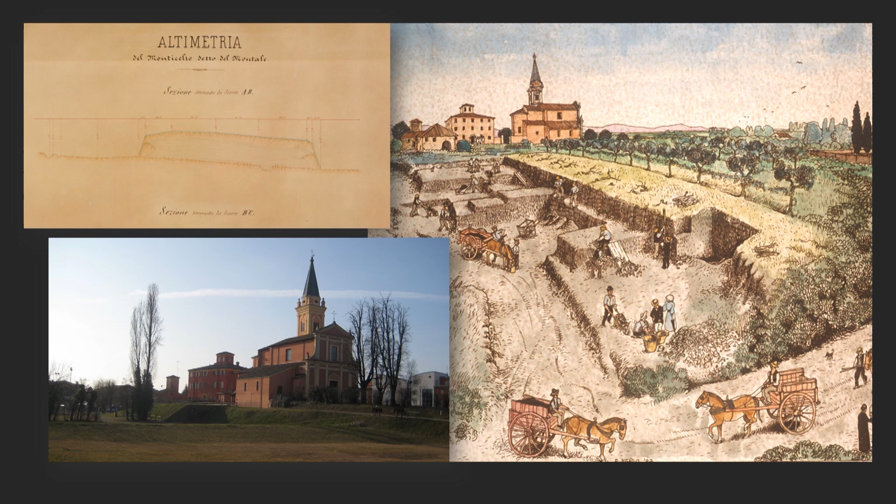Despite the importance of the finds, the hillock of Montale was intensively exploited for the extraction of organic soil, like most of the Terramare settlements in the Po River plain. In 1895, of the ancient village that originally occupied about 1 hectare, nothing was left but the area surrounded by the 17th century church buildings, corresponding to about 1/4 of the village's original size.

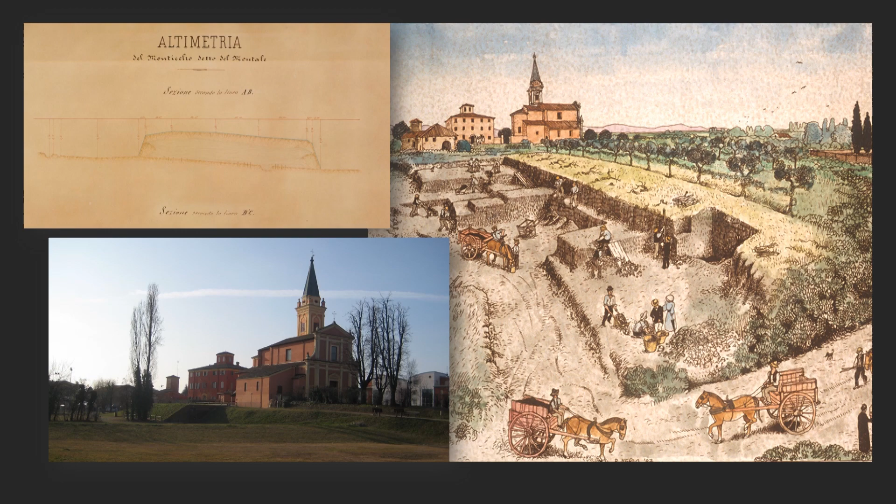In 1994, the Modena Civic Museum restarted archaeological investigation at Montale, and from 1996 through 2002 carried out the archaeological excavation on the intact part of stratification.

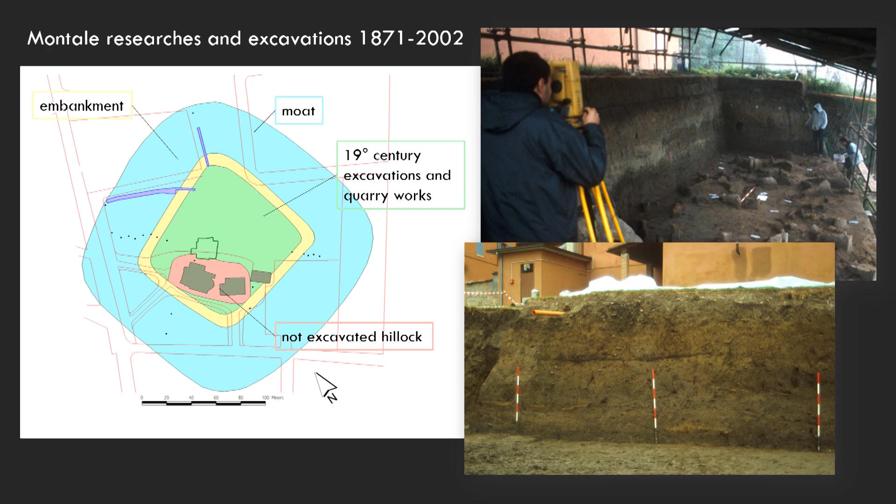The information obtained from the archaeological excavation was so abundant that the project of an open-air museum was progressively developed, in which the reconstruction of the houses, as well as the defensive structures, interacted with the archaeological area originally occupied by the Terramara. The scientific director of the archaeological excavation and of the park project was Andrea Cardarelli, director of the Civic Archaeological Ethnological Museum of Modena until 2003, and now professor at the Sapienza University of Rome.

The park project was shared and supported by Ilaria Pulini, director of the museum from 2003 to 2013. Cristiana Zanasi, coordinator of the park's activities since 2004, is currently its curator.

The museum reference model was that of Northern Europe's open-air museums, with which a lasting collaboration path was undertaken, thanks to the European project ArcheoLive. The aim of the project was to foster knowledge of the strong cultural unity that characterized the Bronze Age throughout Europe, through the reconstruction of archaeological contexts which, built using perishable materials such as wood and clay, have left few archaeological traces. The partners of Modena Civic Museum were the Pfahlbau Museum in Unteruhldingen and the Naturhistorisches Museum in Vienna with the Hallstatt site.

Therefore, starting from scientific and methodological bases, the project for the Open Air Museum actually got underway using the skills of the architect Riccardo Merlo and 2 wood construction technicians who work closely with archaeologists.

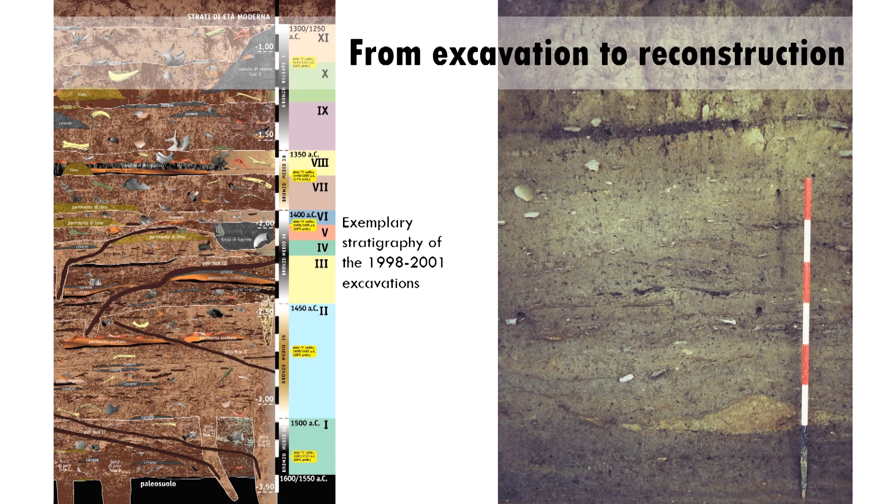The most consistent structural information comes from the first 2 phases, where the presence of post holes and mineralized wooden elements have led to the reconstruction of the floor plans of 2 dwellings and of part of the elevation of the house of phase 2. The houses share the same structural model, and both date to the central phase of the Middle Bronze Age, between the early 16th and first half of the 15th century BC.

They were built on platforms raised 110 to 130 cm from the ground, and had a rectangular plan, with a long side of about 9 meters and a short side of between 6.5 and 7.5 meters. In addition to the alignment of the load-bearing stakes, which supported the roof and walls, stilts were used to support the wooden platform.

Both houses had a 3-nave structure with a porch along the south-facing wall. Some of the load-bearing stakes were preserved for a few meters, and their arrangement suggests the existence of an intermediate floor in each house. At the highest point, the roof was probably over 7 meters from the ground.

The reconstruction of the two dwellings follows, in a strict philological sense, the indications provided by the floor plans of the excavation, with the reproduction of two three-nave structures with a porch on the long side, where the main entrance is also located.

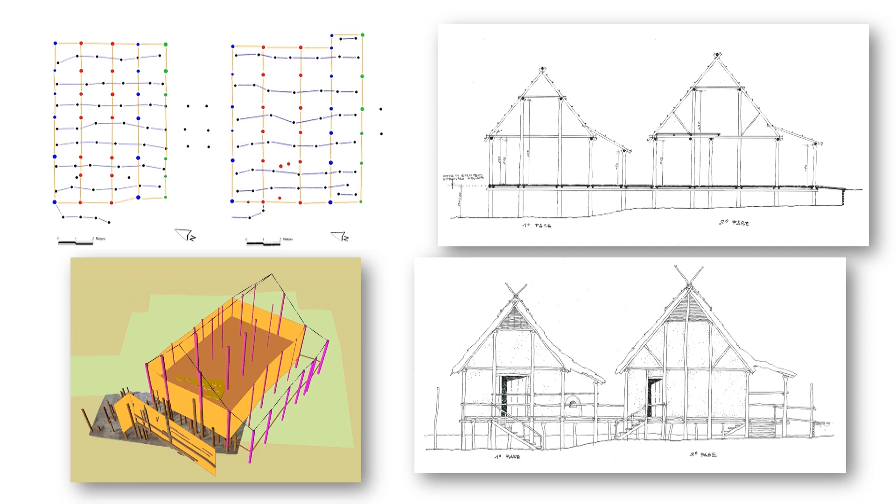In line with the results of the archaeobotanical analysis performed, oak wood was used for the load-bearing structures, which at the time was widely present in the plain. Currently, the oak is available only in the Apennines, the nearest mountains, with specimens not always suitable to the size and shape for the project. For this reason, sometimes chestnut poles were used for the elevated structure.

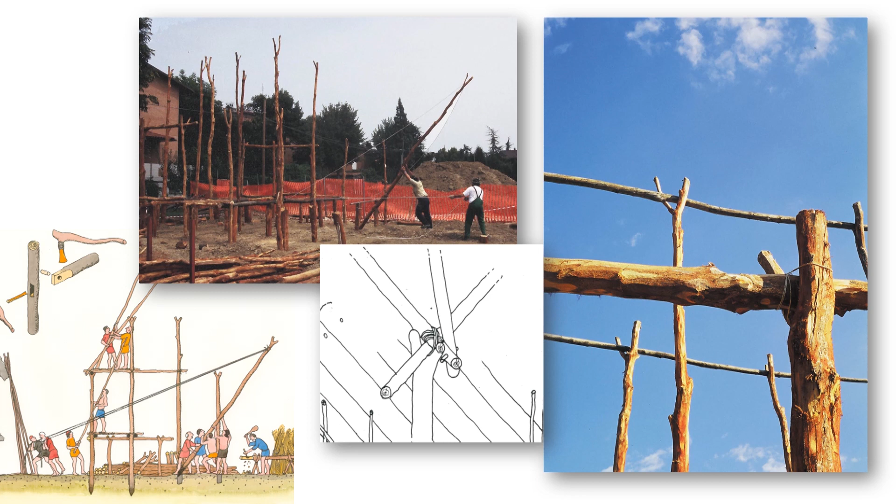Some of the work was performed using faithful copies of original Bronze Age axes and chisels in order to experimentally verify the hypotheses deriving from the archaeological data. The house building was carried out according to the following main steps. Digging of the holes to place the poles according to the measurements and floor plans found in the excavation.

Erection of the vertical poles using taut ropes to ensure the pole is correctly balanced. The vertical poles have a natural fork at their ends to facilitate placing the horizontal spars. Where there were no forks of the required size, it was necessary to construct artificial joints by inserting wooden plugs.

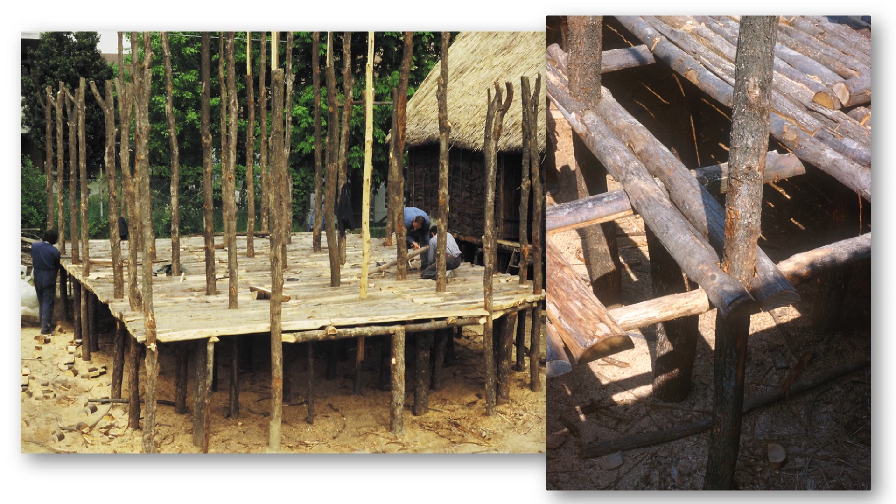Construction of the platform. Cross members are placed on fixed poles. The wooden floor is created with half trunks placed on a structure which is partly independent of that used for covering.

Creation of the double pitch roof. The roofing was made using bundles of swamp reeds, easily available at the time, fixed to the stakes with plant material rope, using a large wooden needle, according to a traditional technique still found in the region of the Po River Delta.

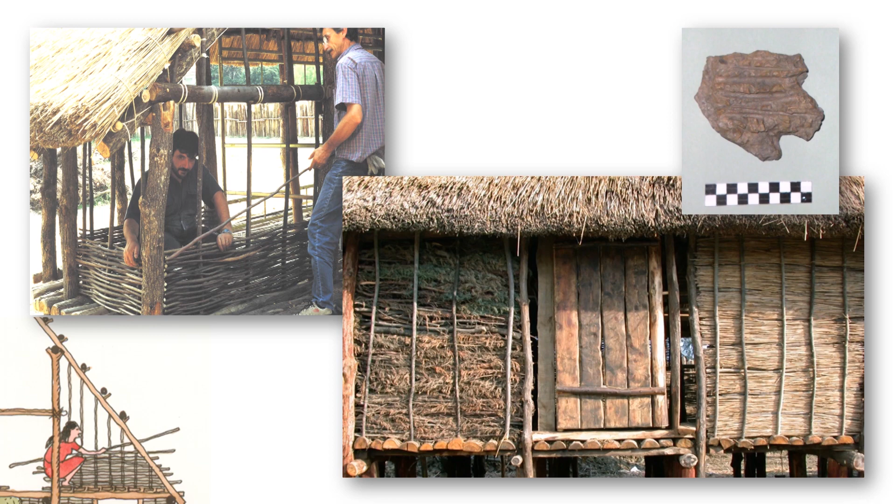Construction of the walls, using a structure of vertical poles positioned on the floor. Three different techniques were used, recognized on the basis of plaster fragments also found in other terramare. Weaving of ash and hazel twigs, filling of the frames with branches held down by horizontal stakes, or with bundles of swamp reeds arranged horizontally and again held down by stakes.

The analysis performed on fragments of plaster and floor showed that the main components, in varying quantities, are silt, sand, and clay, with a small percentage of gravel and organic material. The plaster was therefore made using a mixture composed mainly of silt loam and secondarily of sand, with the addition of small quantities of animal dung. The wooden floor was spread with beaten earth, on top of which a layer of mud and sand was laid.

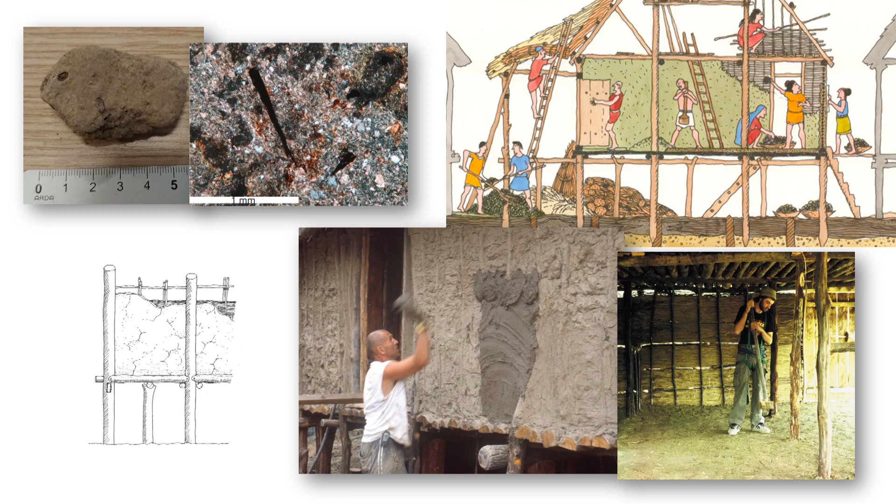The objects that decorated the two houses are replicas of the originals recovered from excavation at the Montale site, or at other terramare settlements. Some objects have been reconstructed using experimental archaeology techniques that have allowed us to investigate aspects of production and their use. In the park, the experimental archaeology projects, dedicated in particular to bronze casting and ceramic processing, continued over the years.

Economic sustainability and safety requirements have partially limited the application of a strictly philological criterion in the design and building of structures. From an economic point of view, a reconstruction made with the exclusive use of experimental techniques and tools would have required much longer production times and therefore unacceptable costs.

The use of modern fastening material in some parts of the reconstructions, the presence of structural elements for access to disabled visitors, and the installation of alarm systems and firefighting equipment inside and outside the houses were necessary compromises with respect to the accessibility and safety of the structures, intended for a primary dissemination function and therefore numerically high, about 50,000 visitors per year.

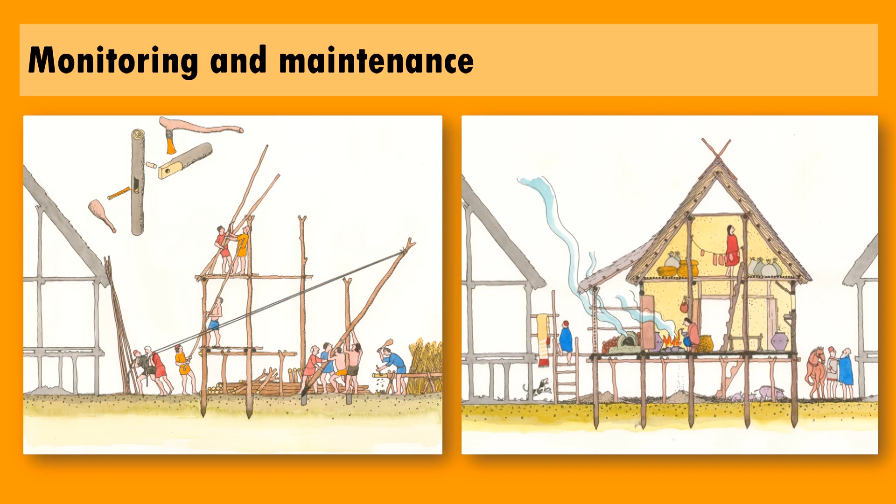The choice to adopt compromises between philological dimension, economic sustainability, guarantee of permanence over time, and evocative impact has also been proposed in the field of maintenance, a priority requirement when dealing with structures in perishable material subject to strong stresses.

Unlike the more durable modern construction systems that provide for the wood to be laid on a masonry base, the construction with poles driven into the ground has the undoubted advantage of being more easily built by few people without the need for temporary works, as each fixture is autonomously stable. On the other hand, modern construction systems generally require shoring during assembly and organized teams of assemblers.

The houses of the time had to be easily built and contain a limited number of people. Local failures were certainly tolerated, and the need for continuous repairs and replacement of elements was seen as normal. The reconstructions intended as a museum area must be usable by visitors according to the current safety standards that the techniques and materials used at the time cannot always guarantee.

To maintain the construction technique of the time and guarantee the safety of visitors, the following strategy was implemented. Forestry technologists of wood control deterioration of the wooden structures through periodic diagnostic investigations. The correct structural functioning is monitored through periodic tests of both horizontal and vertical deformation of the structures, through precision measurements of the relative position between pointers permanently applied to the bearing structures.

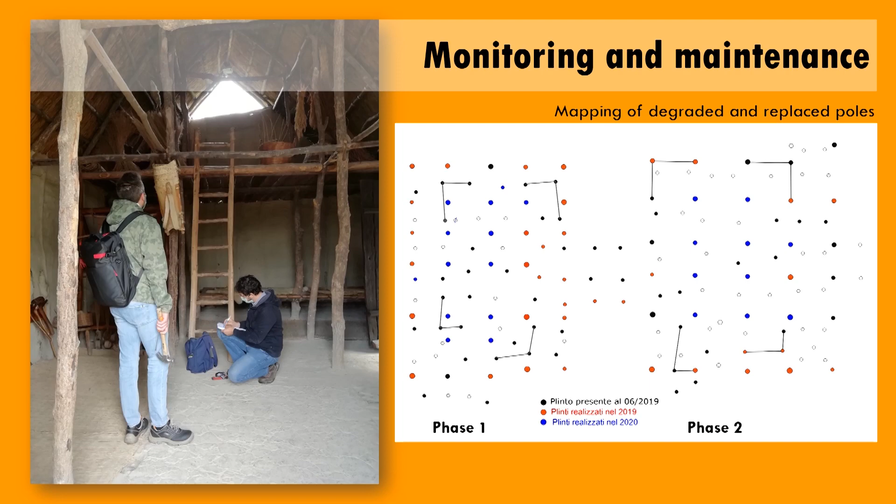As a state of degradation or potentially dangerous subsidence are found, local reinforcements are carried out with techniques similar to the original ones, but also using different materials and techniques, trying to hide these differences. The environmental condition in which the wooden elements are located, very similar to what occurs in nature for dead trees, is crucial for their conservation.

Due to contact with bare ground, presence of water and vegetation, the supporting poles of the two houses are subject to a high biological risk, against which prevention and protection measures can be taken that can prolong, but not indefinitely, the operating life of the structures.

The main advice of the experts on structures such as those of Montale foresees to maintain the minimum possible environmental humidity, to prevent deterioration phenomena from fungi, periodically check the attacks of xylophagous insects, and replace the wooden elements that are too degraded. In this case, it is useful to remove all the bark and sapwood from the pole, as the heartwood is less attackable by fungi and insects, while it is almost useless to burn the tips of the poles or waterproof them with tar or other. But it is better to provide good drainage so that the water does not stagnate and flows away quickly.

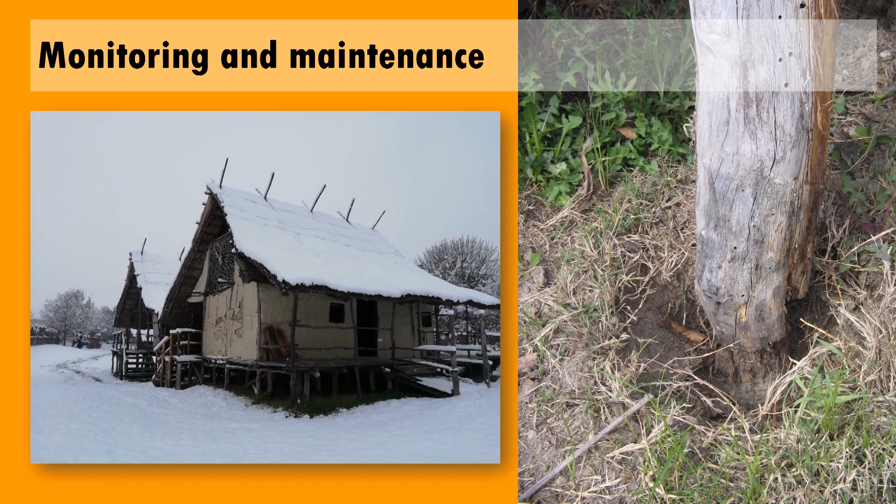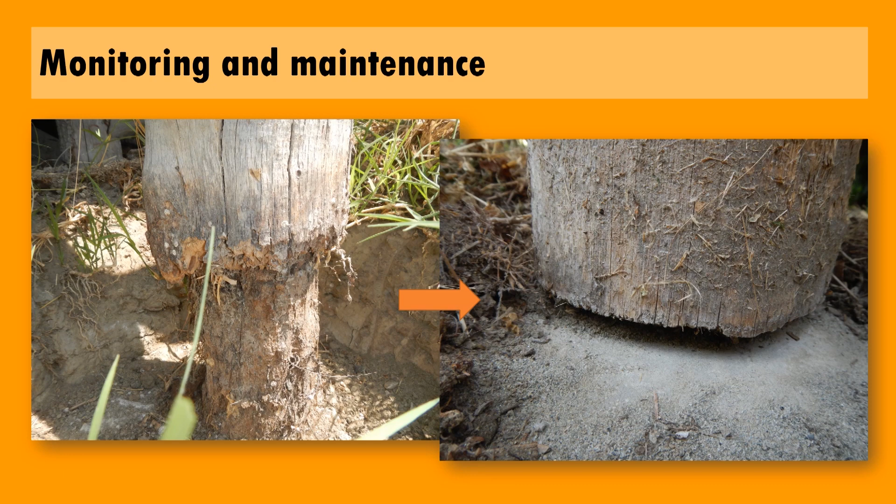The part of the pile driven into the ground is destined to degrade much more rapidly than the one in elevation, due to wood decay fungi, which develop and degrade the wood when the latter is in excessive humidity and lack of ventilation for a long period of the year. To consolidate the bearing poles weakened by the fungal attack, we intervened by placing the single pole on a concrete plinth using a steel spacer that guarantees dry conditions for the wood. The plinth is then hidden by dry plant material.

Another intervention involved the installation of diagonal rods to restore the resistance to horizontal actions like wind and earthquake, gradually lost due to the degradation of the poles in the underground part. The use of materials and techniques other than the original ones served to increase both the degree of safety and the durability of the work.

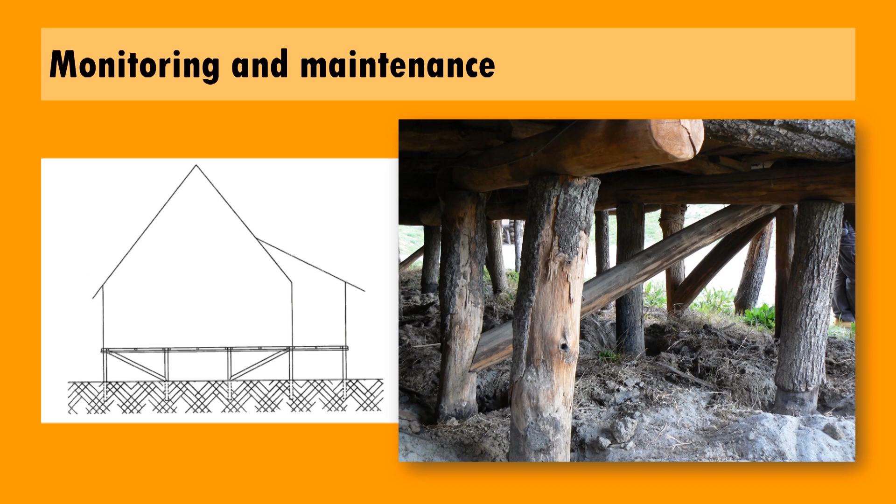We focus our discussion on the problem of wooden structures, the most important for safety, but the other parts of the houses obviously needed intervention too. For example, after 10 years we had to cover the roof ridges with a new layer of reed, while for the necessary restoration of plasters we have recently undertaken a collaboration with a group of architects who deal with green building, and we decided to combine their expertise with archaeological data to achieve a lasting result.

The compromise between the experimental dimension and the usability of the reconstructions is an open theme in the open-air museums. We hope that the experience of the Montale Park, in addition to ensuring a longer life of our reconstructions, will make a small contribution to a common problem.